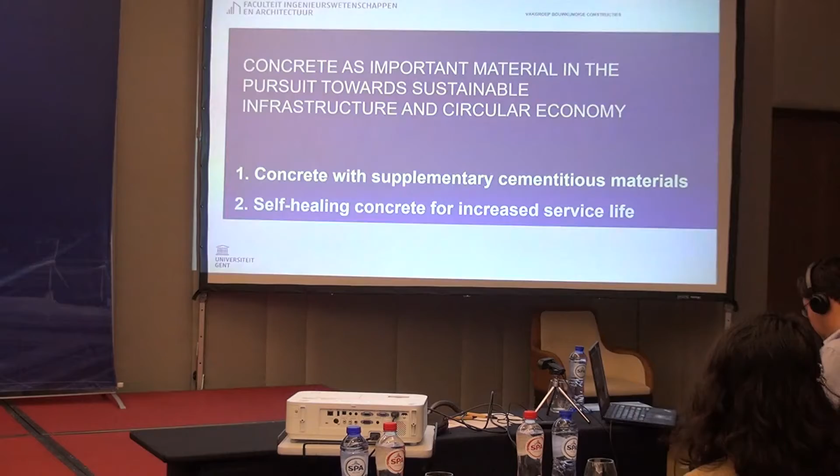The 2 main topics in my research group over the last years have been the use of concrete with supplementary cementitious materials. That includes not only the more common ones like blast furnace slag and fly ash, but since those are getting more scarce in Belgium, we are also considering other byproducts from industries, like municipal solid waste incineration bottom ashes, and slag from non-ferrous metallurgy, like copper and lead slag.

And then the second important topic is about self-healing, because concrete is a material that is quite brittle. It can already crack at early ages because when cement reacts with water, the volume decreases, so you have autogenous shrinkage and drying shrinkage, which can already lead to cracking at a younger age.

These cracks, although they do not really impair the structural stability, may impair the longer-term durability. So self-healing concrete is aimed at healing these cracks in an autonomous way without human intervention, so no external repair is needed. These are the main 2 large topics, but I was asked by Lynn to concentrate now on projects we have in collaboration with China.

Of course, they also fit into those 2 topics, but I will go more in detail for those. So actually I will focus on 3 different ones.

The first one is a bilateral project financed here in Flanders by the FWO and in China by the National Natural Science Foundation of China. On the Chinese side we have the Chinese Building Materials Academy involved, with the colleagues mentioned there, and several PhD students have been working in their lab on this topic of carbonation of concrete at different carbon dioxide concentrations, also in combination with mechanical load.

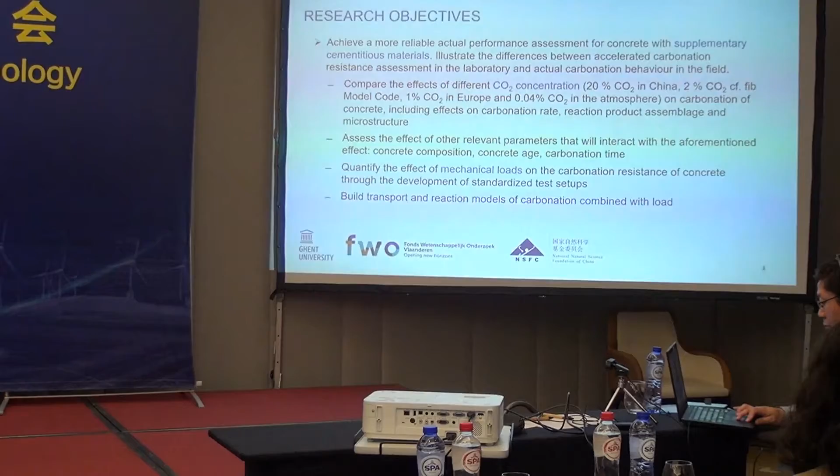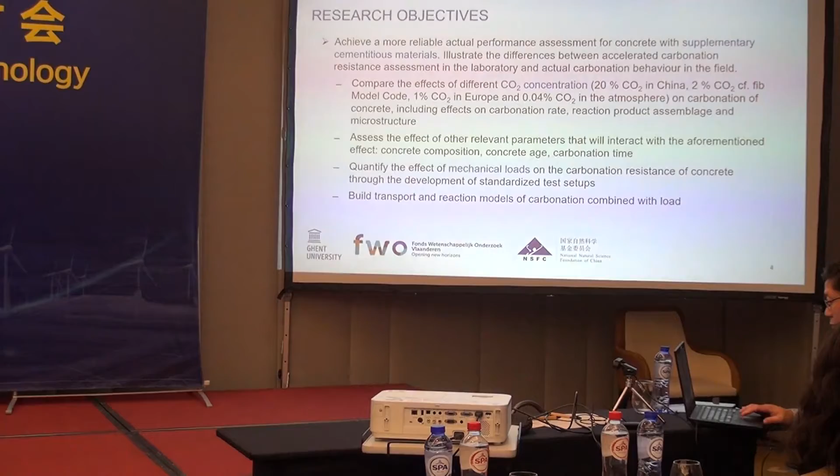So the problem here is that we are looking at concrete with different supplementary cementitious materials. In normal Portland cement concrete, you have quite some buffer because it has a high calcium hydroxide concentration. So when carbon dioxide enters the concrete, it reacts with this calcium hydroxide, forming calcium carbonate.

But since there is a lot of calcium hydroxide, this ingress, this carbonation process, is quite slow. However, if you have pozzolanic materials that react with this Portlandite to form new binders, this is positive, and that's why we can use them as alternative binders. But on the other hand, it has the downside that you lower the buffering capacity and carbonation of the concrete can go faster.

Since this is a session about construction, maybe you know that when concrete is carbonating, it's not bad for the concrete itself, but when the carbonated zone reaches the steel reinforcement, it can start to corrode. That is then one of the most important problems of concrete degradation.

Now, generally, we study this carbonation in the lab, and there we want to have results faster. So what we do is use carbonation chambers with a higher carbon dioxide concentration.

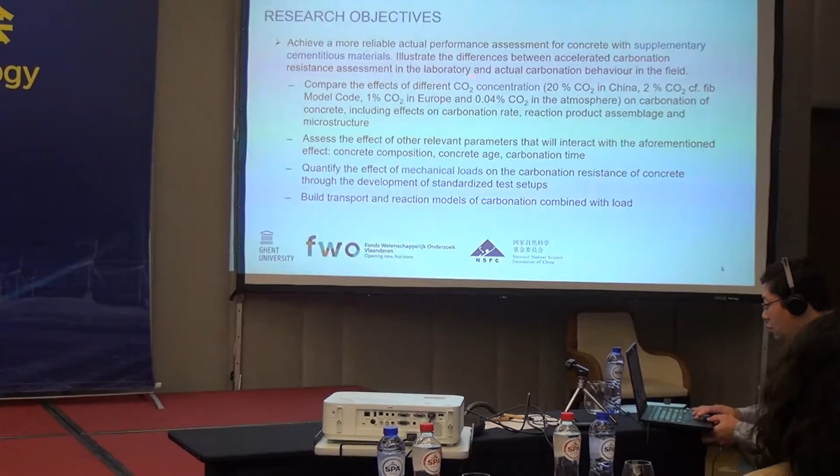Here in Europe, generally we test at 1% carbon dioxide, or 2% if we follow the FIB model code, whereas atmospheric concentration is around 0.04%. But in China they have a different standard and they test at 20% CO2. So we wanted to see the effect of the concentration during accelerated testing on the results.

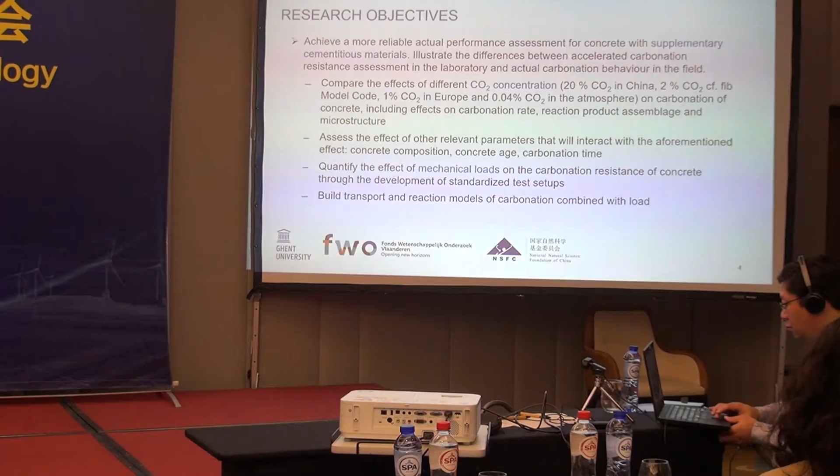In addition, we looked at other parameters like concrete composition, age, carbonation time, and so on. And since in a real structure concrete is mostly under load, we also wanted to investigate the effect of the load on the carbonation rate.

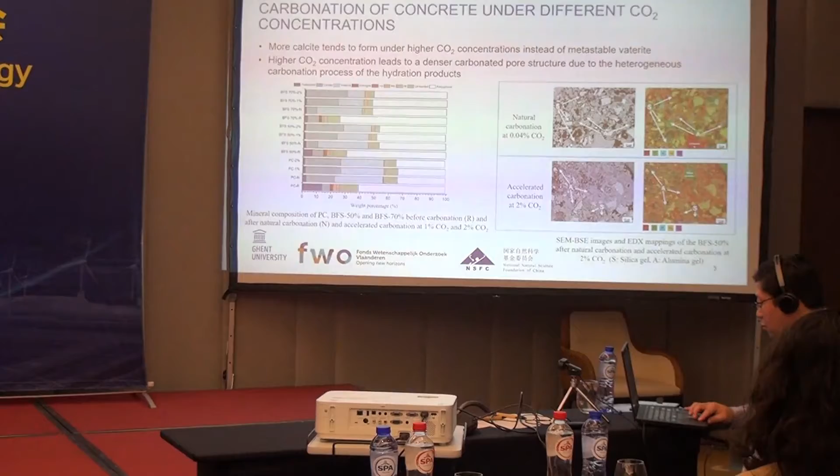So some results of what this PhD student has been doing: for instance, he has been analyzing the mineralogy of the products present in concrete with different percentages of blast furnace slag in normal Portland cement concrete, and then with 50 or 70% of the Portland cement replaced by blast furnace slag.

He analyzed what is happening if you carbonate under natural conditions or at 1 or 2% carbon dioxide for these different compositions. One thing you can see is that the Portlandite, the calcium hydroxide, is transformed into various types of calcium carbonate, which may differ depending on, for instance, the carbon dioxide concentration.

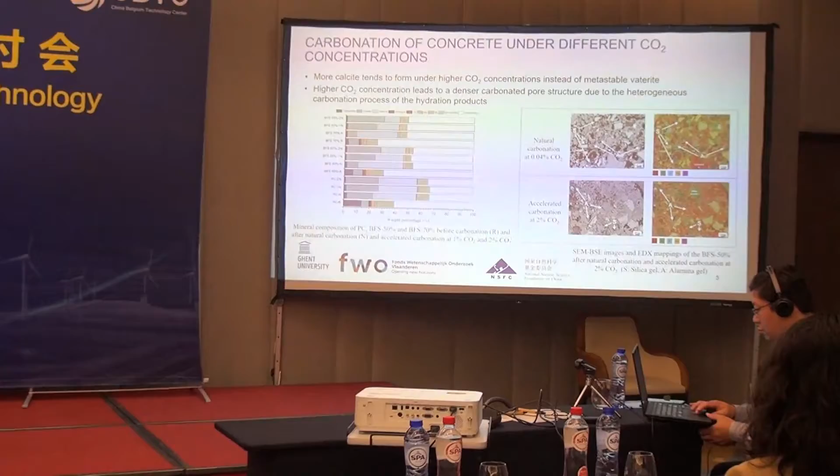At natural conditions, you have a little bit of calcite and much more vaterite, which are two polymorphs of calcium carbonate, but if you increase the CO2 level, this proportion changes. So the percentage of carbon dioxide in accelerated tests will have an effect on the polymorphs formed, and also a little bit on the amounts formed.

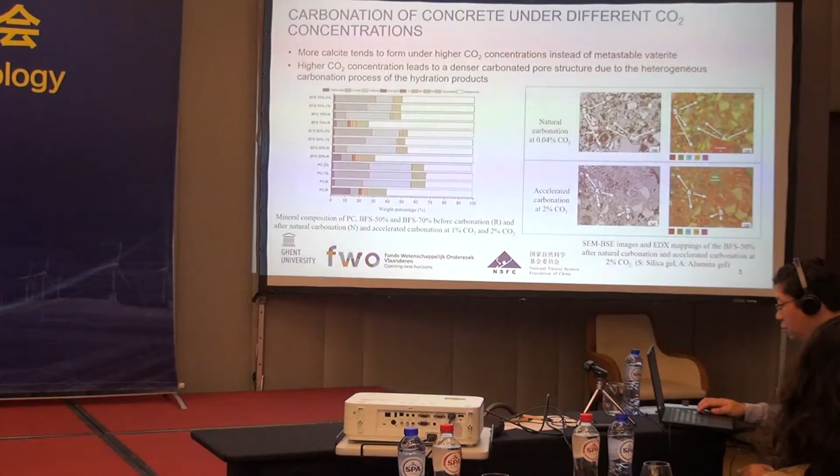He also looked at the densification, and especially when comparing natural versus accelerated carbonation, with accelerated carbonation you see more densification of the concrete itself. This can be studied, for instance, with scanning electron microscopy.

Then, like I said, he also tested the effect of load. Imagine that concrete in a structure is in a column or a beam under compressive loading. What actually happens is that if the load is not too high, you compress the pore structure so it becomes less porous.

So the CO2 will enter slower, but then micro cracks start forming if you increase the load, and of course the cracks will increase the ingress of CO2.

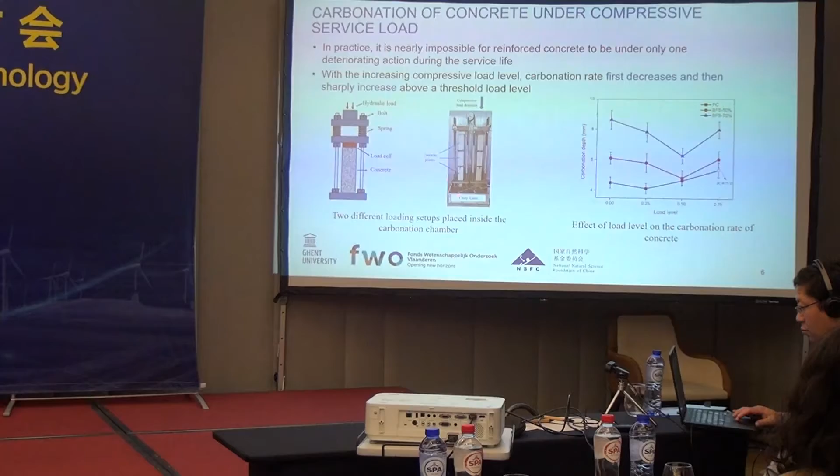We wanted to test this with developed equipment to keep the concrete under a constant load using spring washers and so on. But since concrete is a material that also undergoes creep deformations over time, it was easiest to use creep frames with a pressure vessel to keep the load always constant on this column of stacked prisms.

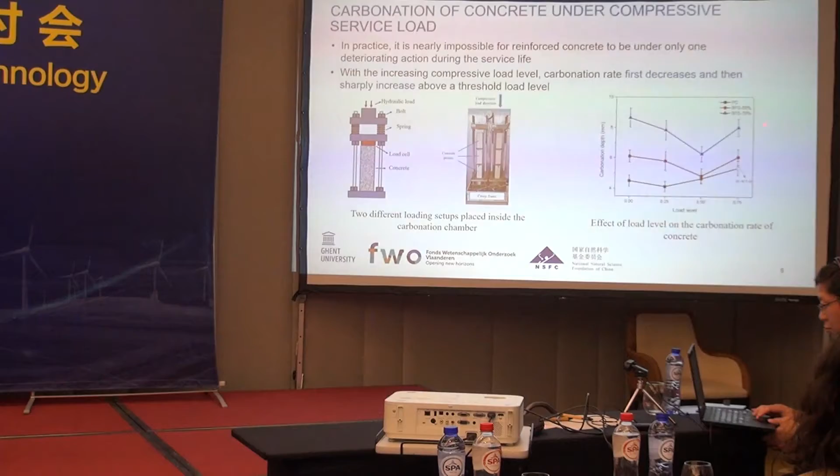You see that carbonation depth, depending on the load level, is decreasing, and then after a certain load level, here being 50% of the failure load, it increases again. This is quite different depending on the concrete composition, without or with different amounts of blast furnace slag.

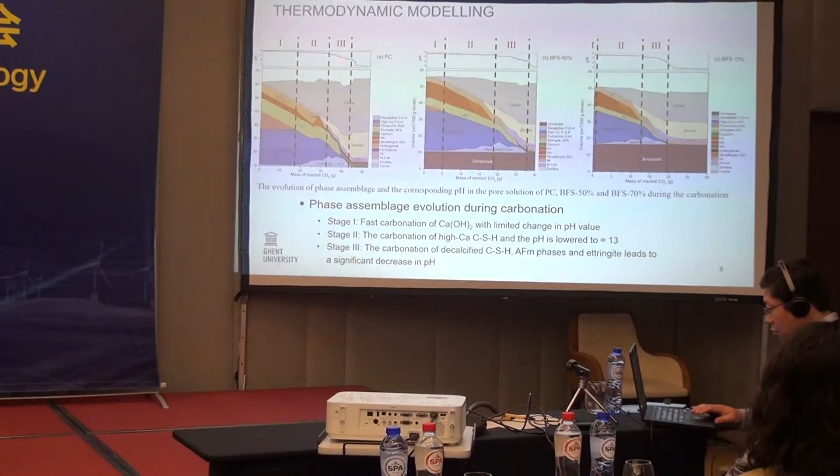He also modeled this with thermodynamic modeling, looking at how the different phase assemblages were changing as the portlandite was being used, and then the pH gradually decreasing, which is actually why reinforcement corrosion starts. Again, this will be different depending on your binder system.

But I will not spend too much time, because I think I have 15 minutes, so I want to say also something about the other two projects.

So this is Jinbing Yang. He's actually a joint PhD student between Tongji University and Ghent University, working with a CSC scholarship, spending 2 years at each host institute.

He's working on the use of alkali-activated systems and trying to mitigate shrinkage effects by introducing superabsorbent polymers, which is like the material you find in baby diapers.

These are polymers that can absorb huge amounts of fluids, and they release the fluid again when the concrete is shrinking, hence mitigating the shrinking effect. Later they can also supply more water if the concrete would crack, to introduce self-sealing and self-healing.

So actually, he did various studies — you saw the four topics he is working on. For instance, he used nuclear magnetic resonance studies to model this absorption-release behavior of the superabsorbent polymers in concrete.

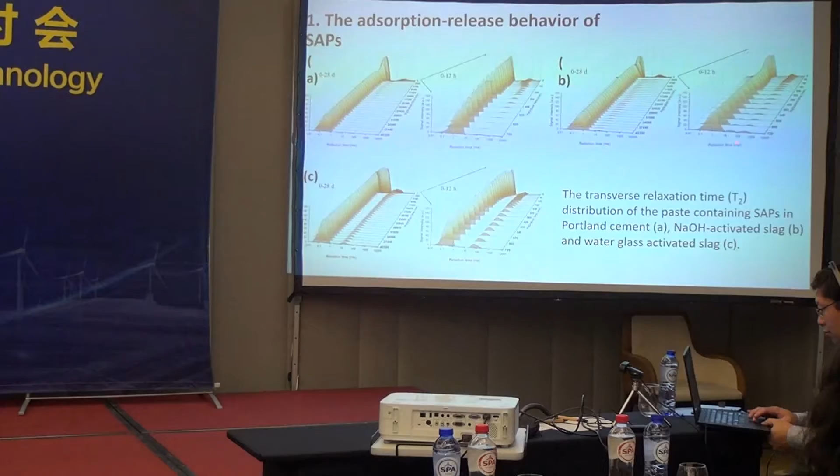Again, for different compositions with alkali-activated materials, he saw, with this hump in the T2 relaxation time, the water in the superabsorbent polymers and how it is decreasing over time, since it is released to the concrete at the moment it is needed, because otherwise self-desiccation and shrinkage cracking could occur.

Oh, that was too fast.

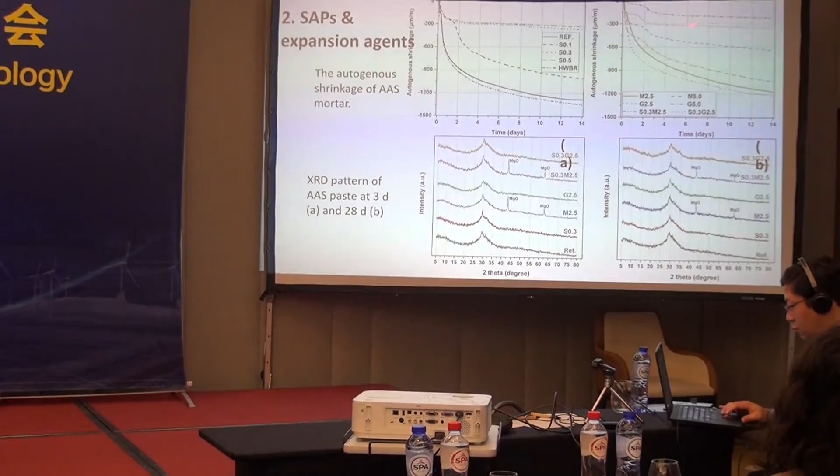He's also looking at superabsorbent polymers, really measuring this shrinkage effect. Over time, at young age, concrete shrinks a lot, and if you add different amounts of superabsorbent polymers, 0.1, 0.3 or 0.5% versus cement weight, the shrinkage can be mitigated. He compared this to expansive agents like gypsum and magnesium oxide, and the combination of magnesium oxide and superabsorbent polymers led to the biggest mitigation of shrinkage effects. By XRD he could explain why this combination gave a synergetic effect: the superabsorbent polymers stimulated the action of the magnesium oxide.

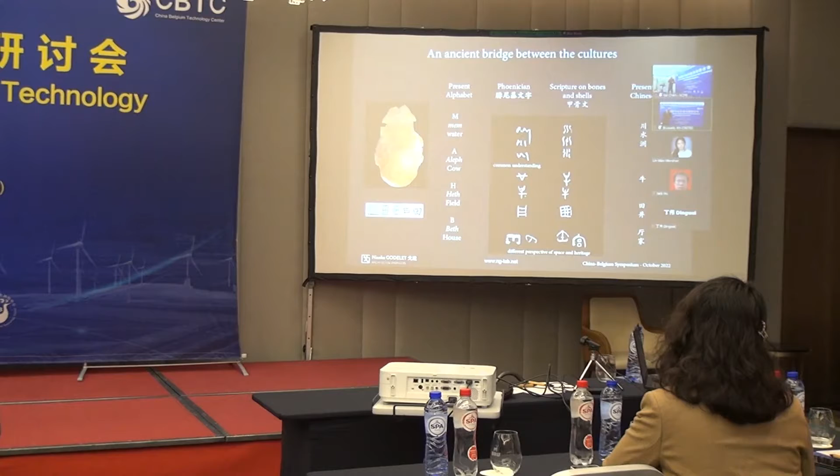We share common grounds and common culture from very ancient times, and we have always exchanged knowledge between the 2 countries and the 2 areas.

That's my house and that's my office. I live in the very center of Beijing, and our office is over there.

Beijing has seen a lot of huge changes, and you see that Beijing is actually a very green city. Most foreigners don't know that, but the very core of Beijing city is full of gardens, very pleasant life.

It's a city that's growing to the 6th Ring Road now, 30 kilometers diameter. It's a huge expansion.

Beijing faces a lot of new needs, in terms of energy, transportation, water, and is trying to connect and interconnect between Beijing, the sea, and the land. You see that this huge area is full of agriculture, but we have a big problem, we don't have enough water. So we need to focus on many, many things.

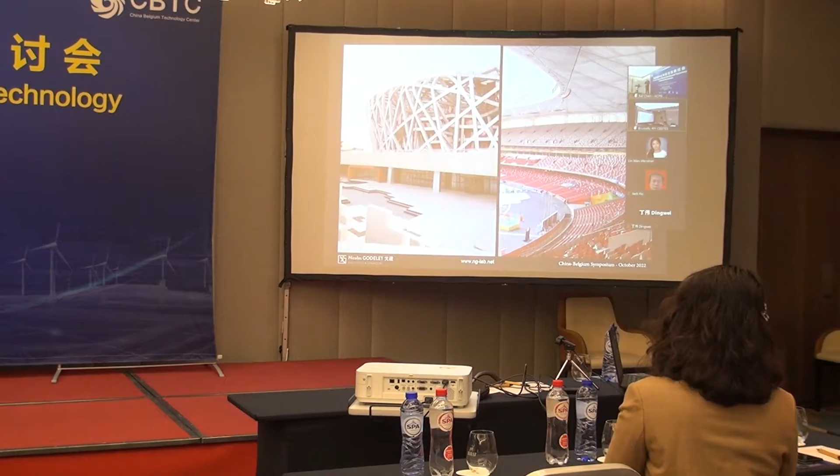We had too much steel, so we had to take it off, and the roof disappeared, unfortunately, but it was mandatory. We worked on the last Olympic Games that you have seen, and this one took a completely different orientation from 2008.

We used Shougang, a steel mill in Beijing, a huge steel mill of 10 square kilometers. We renovated 3 square kilometers of it. We worked with Chinese Institutes, including Tsinghua, and the whole site was completely rehabilitated into a sports area.

You can see the 3 square kilometers, it was a very polluted site. So we worked on Chinese culture and contemporary architecture, on depollution of a very heavily polluted site, and how to recreate a green city into a very dense environment like Beijing.

That's the big air jump. All the snow is produced during night time with only ventilators. All the snow melts and is brought back to the lake, from the lake making snow again. So we didn't use high-tech systems for that, but we had them in backup.

And that was a great event that is quite sustainable, because we finished the project in 2019, so all the events that happened on the big air were already giving back the money of the investment. That's important to be economically viable when you do a project as an architect. It was completely different from 2008. There's a huge change in the vision of the Chinese government on these facilities.

Garden city is super important. Here you can see the Belgian pavilion. That is a great opportunity between Chinese engineers and Belgian engineers to create a new structure system that is called tensegrity. You cannot see that kind of structure very often. It's very complicated to calculate and especially to build.

UNESCO pavilion for the '19 Expo is a bamboo structure. Now we can really focus on the association of new materials, of biological materials and steel, to create very contemporary structures. They are coming.

This is the Holland Belgian pavilion with edible landscape. So now we change the landscape so that we try to push cities to create landscapes that you can eat, not just see. And that changes a little bit the data, because you don't choose the same trees, you don't choose the same vegetables. This building is also made of CLT and earth bricks.

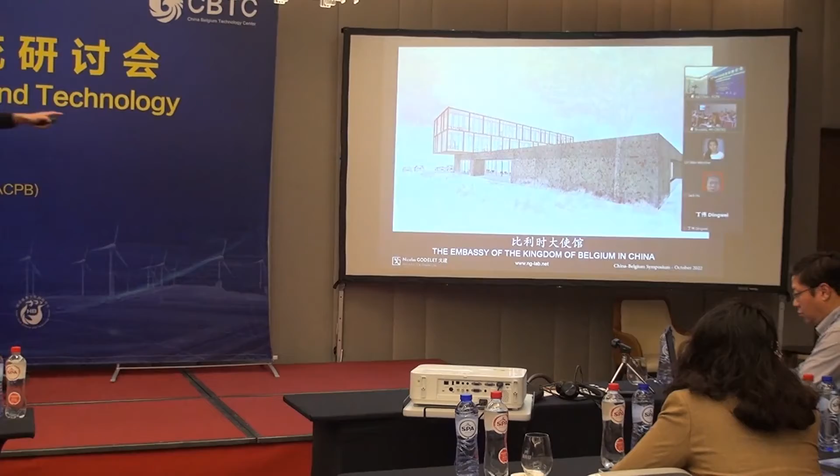Representation city, that's the Belgian embassy that will emerge next year. Wood structure, first office building made of wood in Beijing, and all the materials on the base are recycled residues from the other embassy from the 60s, 70s. So we recycle all this material to make the new one. And the Belgian government took that risk to give us the project with that idea.

Thank you to them. You see that concrete can be recycled in many, many ways. French embassy, I will not talk too much about. I need to control time.

Transportation, super important. Beijing is now developing a whole 30 kilometers of bike lanes. We did 6 kilometers of them, built in 6 months, everything prefabricated. The speed is incredible. You cannot do that anywhere else. It's in the north of Beijing. Everything is Alstom, new kind of battery, new kind of transportation and tramways. The Chang'an Bridge that just finished 3 years ago.

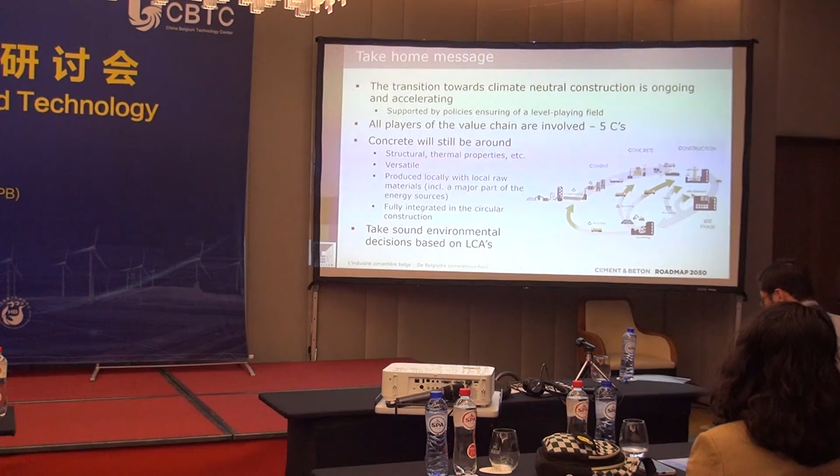Okay, so let's start. And first, I'd like to start with the message that I would like you to recall from this speech, the take-home message. First of all, what I would like you to remember is that there is a transition towards climate-neutral construction which is ongoing and it is accelerating. It doesn't seem to go sufficiently fast, but it is accelerating. And what is also very interesting, more from a European point of view, it has to be supported by policies and level playing field policies. Europe has defined ambitious objectives for 2030 and 2050, and the policies are supporting that.

What is also important, so I'll focus on cement and concrete, but actually cement and concrete is just a small part of the construction value chain, and all the players have to play their role in this journey. Concrete will still be around. There is some development of new materials, and it totally makes sense, but concrete has some features which are useful, like structural, thermal properties. It is versatile, a lot of things can be done with concrete. A very strong point is also that it is produced locally, with local materials - the granulates, sand, the cement - it's all sourced very locally. Also, a point which is often not recalled is that concrete is very much integrated into the circular construction and circular economy. And then the last point I would like you to remember, and it was said also by Nicolas, is that environmental decisions have to be taken based on using the right materials at the right place. And there are ways to measure that and quantify that and use that to make sure that the best combinations are used.

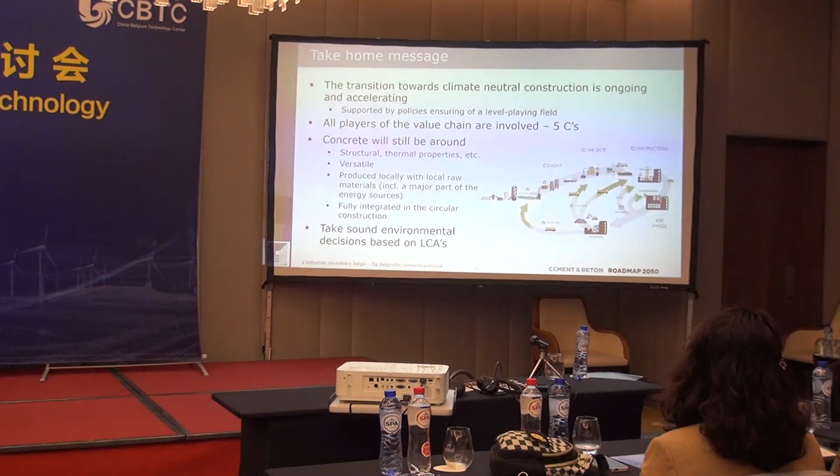So, agenda first: I'll introduce cement, the federation, our Belgian Cement Federation, then our concept of the 5 Cs, how we plan to achieve climate neutrality of cement, which is quite a challenge. A few examples also along the value chain, and then our vision, circular economy, and also the notion of life cycle analysis to take decisions.

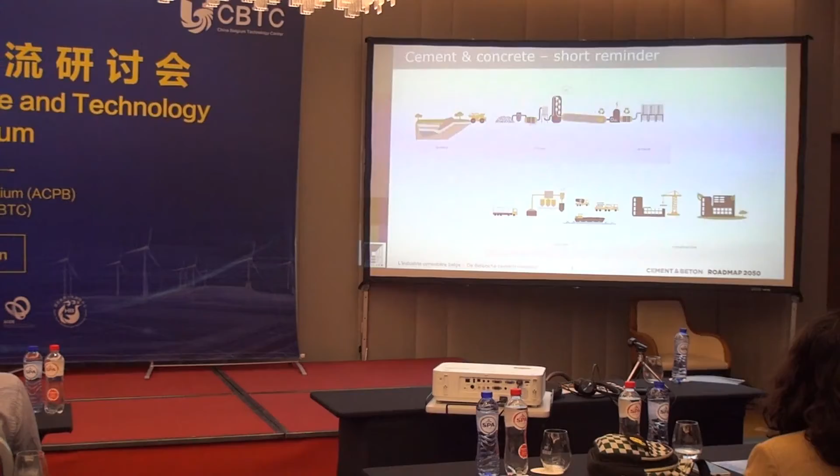Just as a reminder, to produce concrete and cement - making the difference between cement and concrete is not always clear for everyone - we start from a quarry, quarrying the limestone, and then this limestone is crushed and introduced into a kiln, where there are actually two chemical reactions. The first reaction is called decarbonation, at a temperature around 850 degrees. The calcium carbonate, the limestone, will transform into calcium oxide and CO2. This is a chemical reaction and it is unavoidable; you cannot do without this in your process to produce what we call the clinker. The clinker is the active part of cement. So the first reaction is the process reaction, and then there is a clinker reaction where the calcium oxide will combine with the iron oxide and the silicate to form this famous clinker.

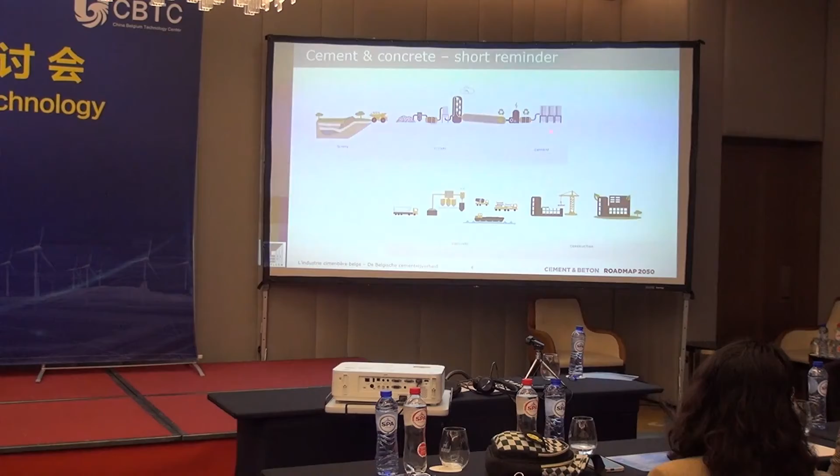A strong point in Belgium is that most of the fuel we use has high energy consumption, but we mainly use non-recyclable waste, not gas, not coal. So it's also part of the circular economy.

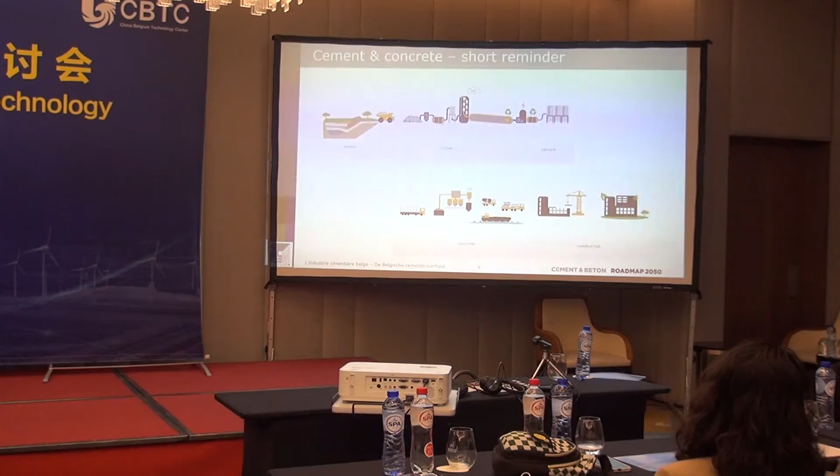In the second step, this clinker is milled and combined with other cementitious materials like blast furnace slag or calcined clays, with the objective to substitute a part of the clinker, which is the heavy part in cement.

Then cement is taken into a facility to produce concrete, which is just a mix of about 10 to 15% cement, water in roughly half the quantity, and then some granulates and sand. This forms concrete, with a number of combinations depending on the application.

Then it is used either as building materials, building blocks, prefabricated material, or it is poured on site, and then the building has its own life. Okay, that's just the basics.

In Belgium, small country, we have 3 cement players belonging to large international groups: Heidelberg Materials, Cementir Holding, and Holcim. You will see most of the cement production is in the Walloon part of Belgium, the French-speaking part, because it's close to the deposits of limestone. Cement plants are always located close to the quarries.

You will just see one plant here for CBR. It's in the port of Ghent, and they're actually using the clinker produced here to mill it in this case, which also offers them the possibility to potentially import clinker from other countries if useful.

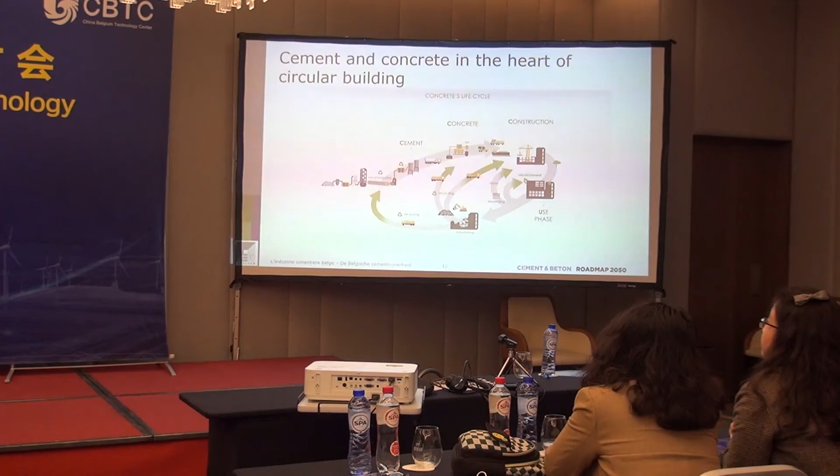Circular economy: you have a number of places where concrete can be either reused or recycled, or at the level of cement—there are a number of steps I will not detail—but these are different points where it can re-enter the construction value chain.

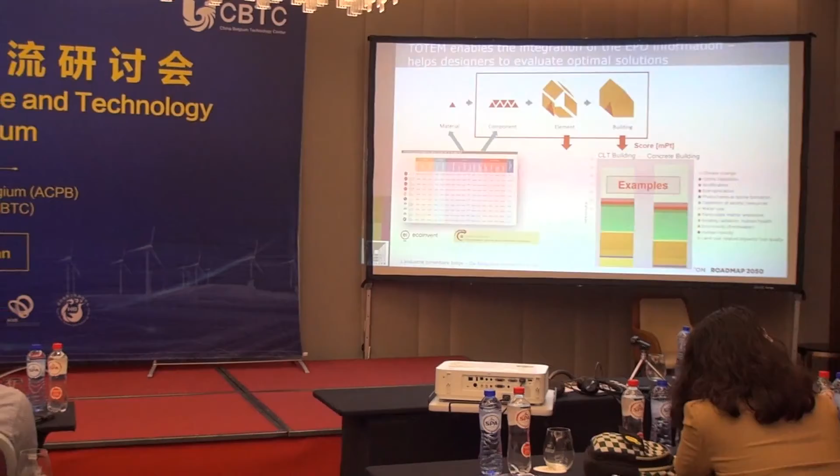I will not spend too much time on that, but we have developed in Belgium a tool which puts together the environmental product declarations of each building material, with a number of indicators. This enables architects to make sound choices in materials and test the global footprint—not only climate footprint, but the total footprint—of all the building materials on the project they're working on.

And this makes it possible to think and choose the right solution. You may have some building materials with a lower global warming footprint, but a high footprint in terms of water use, for instance, or use of land. And this has to be taken into account. This is a reality which depends also on the continent where you work, the country where you work—so it's not one size fits all. This is really important: at the design phase, there are decisions taken based on the building materials.

So that's what we want to achieve: net zero by 2050. We still have this date, 2050, but I'm pretty sure we'll go much faster than that. It won't be 2030, but somewhere in between. I'm pretty sure we can achieve that properly. Thank you very much.

Thank you, Evi. Is there any question in the audience?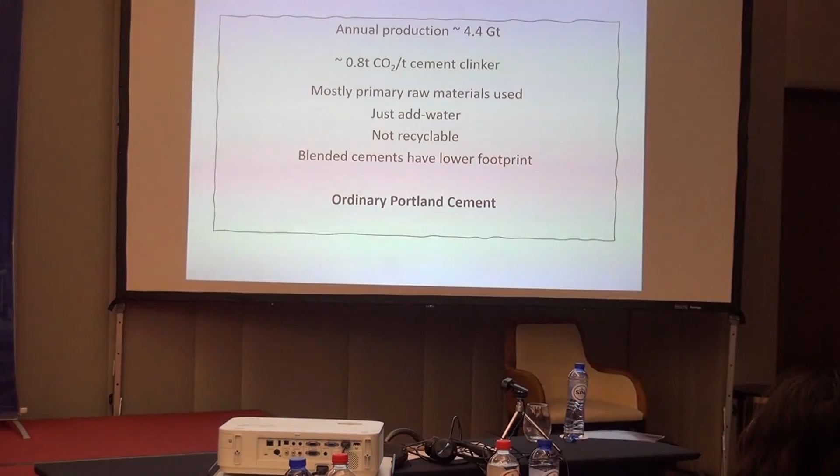This material by itself is not that much reusable - okay, there are some recyclable options definitely. But I think we can agree that it is using a lot of raw materials, primarily raw materials. So I think we need to change this because we cannot continue like that.

Is there a future for cement? If you look at the cement website, then there are new innovations - trends to improve the sustainability, strength, application, etc. So I think yes, there is a future for cement, and I think it would be a bit silly to say cement should not be part of the construction sector.

Is it good? Well, to use this material in these quantities, okay, that's a question. I think we should look at alternatives, maybe niche markets for other materials. So what we do in the Sremat group, which is the group of KU Leuven, is focus on sustainable resources. We focus on iron-rich industrial residues, mainly bauxite residue - residue from aluminum production - or copper slags.

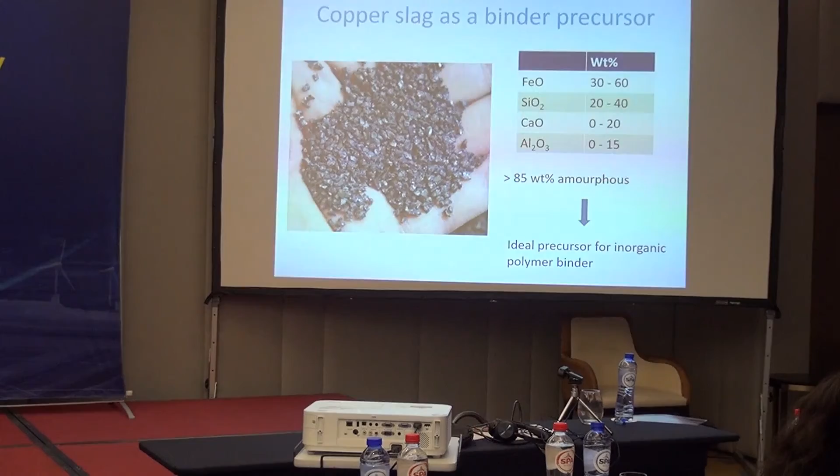So if we look at copper slag as a case study - copper slag looks like this, it is like 30 to 60% iron oxide, then some silica, calcium, alumina. Due to the water quenching, it is above 85% amorphous, which makes it an ideal precursor for inorganic polymer binder.

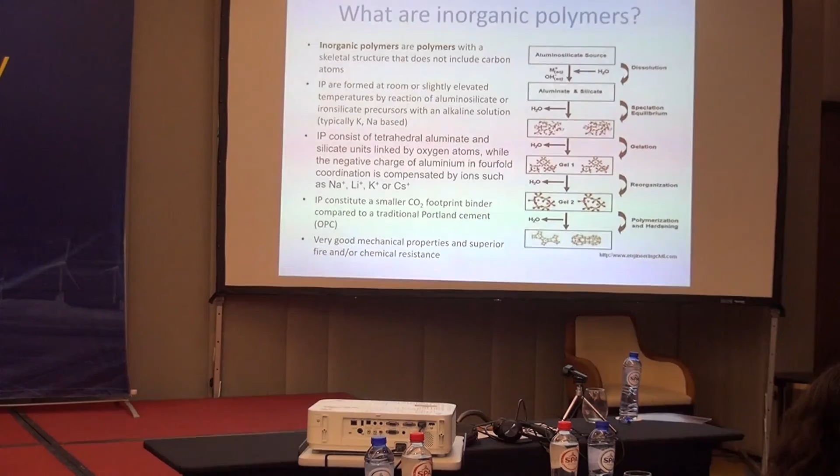Now, what is an inorganic polymer? It's a polymer that doesn't have any carbon in its structure - that's why I call it inorganic. It's made by dissolving alumina silicates or iron alumina silicates in an alkaline environment. Then there is some gelation, polymerization, and hardening, and like that we create a binder.

So this binder - all this reaction happens at room temperature. So we have a very low, much significantly lower CO2 footprint, and we end up with a material that has quite good mechanical properties, and compared to cement or concrete, some superior properties like fire or chemical resistance.

Okay, so how do we actually work with, or how do we create inorganic polymers? We basically take the amorphous precursor, alkaline activator, which can be hydroxide or silicate. We mix it and we end up with inorganic polymer paste, and this paste can be pressed, casted, 3D printed, or foamed.

It can be cured at room temperature, it can be cured hydrothermally in a big autoclave, it can even be fired, depending on the application you want to use it for.

Some case studies, because the title said that we go for unique properties, so let's start with high temperature properties and resistance, and fire resistance.

In my previous slide, I said how inorganic polymer can be made. Now if you take the mix design and play with it, you can end up with a mixture that has different behavior at high temperature. You can end up with a material that has quite a low melting point, where you can maybe use this material as glass ceramic, or as a glaze, or you can make the mix design in such a way that you end up with passive fire protection boards or even refractory materials.